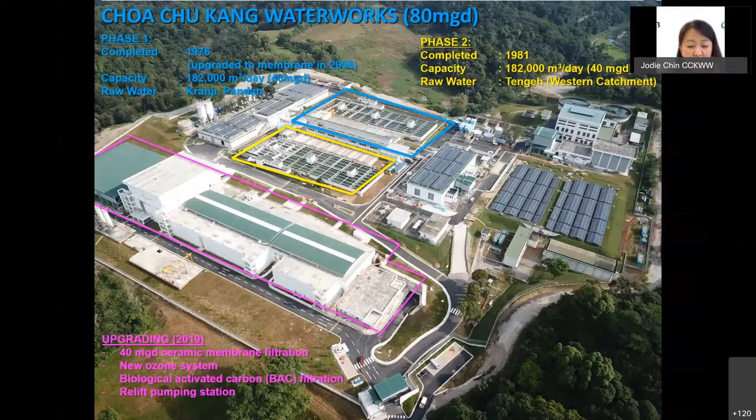We recently upgraded the plant in 2019, which is what I'm here to share with you today, with new ceramic membrane, ozonation system, as well as biological activated carbon, in short BAC. I'll run you through more on the processes in the next few slides.

Choa Chu Kang Waterworks is a bit unique compared to other waterworks. We take in our raw water from 3 different sources, which makes the operation more interesting and more challenging. We get our sources from Kranji, Pandan, and Tengeh reservoirs, so it's a mixture of them.

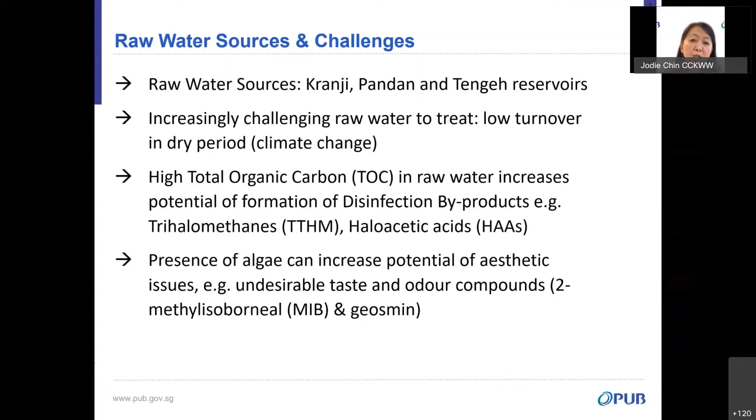As we go along, we have seen increasingly challenging raw water as Singapore urbanized at the backdrop of climate change - either very little rainfall or too much rainfall at one time, affecting our drainage system. Prolonged dry periods cause low turnover in the reservoirs, resulting in water quality changes. These 3 reservoirs generally have higher TOC, which increases the potential for formation of disinfection byproducts. Also, algae in the water can cause aesthetic issues such as MIB and geosmin. This is an issue because some customers are very sensitive and can pick up these taste and odor issues very quickly - not all of us will, but they will. With these challenges in mind, PUB has to continue our efforts to explore and deploy technology to ensure safe drinking water at affordable price to our customers.

Let me give you a quick run through of the overall processes. In phase 1, raw water from the reservoir goes through coagulation and sedimentation, where compounds such as NOM and DOC are removed. The settled water is then filtered through the membrane process in phase 1 and sand filter in phase 2.

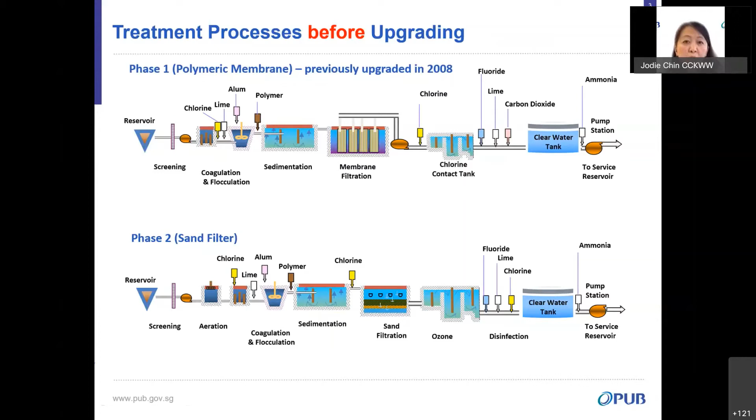Before going through the usual chlorine contact tank and ozonation respectively, the water then goes through the last stage of pH adjustment and fluoride dosage before being sent to the reservoir for distribution. So how do these processes change in 2019 when we had a major upgrade?

In 2019, the plant was once again upgraded, where ceramic membrane is introduced to phase 2 of the process. The sand filter was not taken out, but left as a provision. We added the ceramic membrane to the processes, and also combined phase 1 and 2 downstream processes, introducing ozonation, post-ozone reaction tank (PORT), and biological activated carbon (BAC) to our downstream processes, combining them towards 80 mgd.

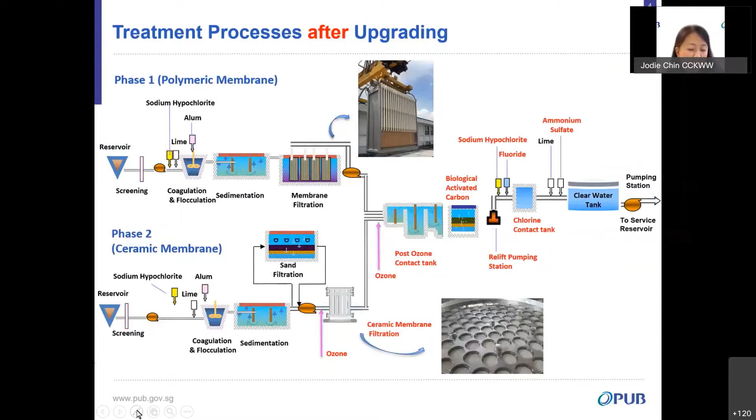This is a transition from our earlier stage of processes, from very conventional sand filter down to polymer membrane and then to ceramic membrane. This 40 mgd ceramic membrane currently housed in Choa Chu Kang Waterworks is the largest in the world. Here's a diagram showing our newly upgraded plant on the left, and the ceramic module with nominal pore size of about 0.1 micrometer on the right.

We have 12 such ceramic membrane modules, with 12 trains of 90 ceramic membrane modules housed in a single stainless steel vessel. Ceramic membranes have 4 times longer lifespan compared to polymer membrane, approximately 20 years versus polymer membrane's lifespan of about 5 years. Ceramic membrane is also able to withstand harsher chemicals by its own material.

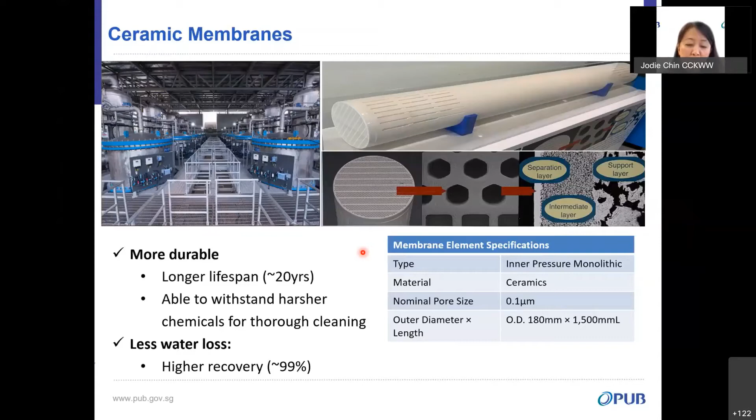Our system is a bit unique. This ceramic membrane system at Choa Chu Kang Waterworks is operated continuously with pre-ozonated feed water, meaning ozonation is ongoing on the surface of the membrane. The presence of ozone in the feed water ensures the membrane surface is cleansed continuously while filtration is ongoing, effectively reducing fouling. As a result, the ceramic membrane achieves high recoveries of more than 99% and high flux rates. So this is what we've seen so far in the ceramic membrane.

What about the ozone generator shelters we recently upgraded to? We had ozonation before, but now we've upgraded these ozone generators too, and they're much more efficient. We used to have 12 ozone generators to supply 80 mgd, but now it's replaced with only 3 new ones. Originally housed in a full ozone building in Choa Chu Kang Waterworks, now it's 3 small ozonators housed in a single room.

This is important to a utility like PUB because we are now in a land-scarce Singapore. Any land efficiency will help us in our design for new plants.

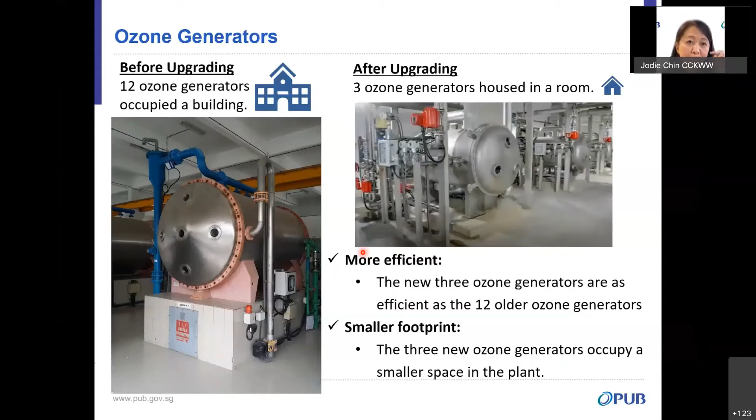What I shared with you just now was the ozone generator, which feeds into the PORT, the post-ozone reaction tank. Over at Choa Chu Kang Waterworks, we have 4 of such tanks, each with 6 cells, for the CT to be achieved. Here are pictures of the ozone generator and the PORT.

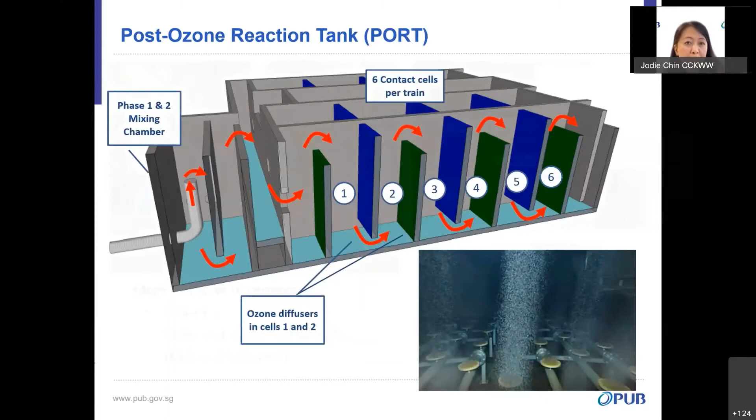While ozone disinfection is not new at Choa Chu Kang Waterworks, the use of BAC filtration there is a first in Singapore for drinking water treatment. Previously, CCK Waterworks used ozonation as a single-step process for disinfection, but it was unable to manage the high level of organics in the raw water. Subsequent downstream chlorination in post-treatment had to be delicately managed to avoid formation of disinfection byproducts, which was hard for our operators to manage. With the introduction of BAC filtration downstream of ozonation, dissolved organics are removed from the treated water, creating a biologically stable water and eliminating the risk of disinfection byproduct formation.

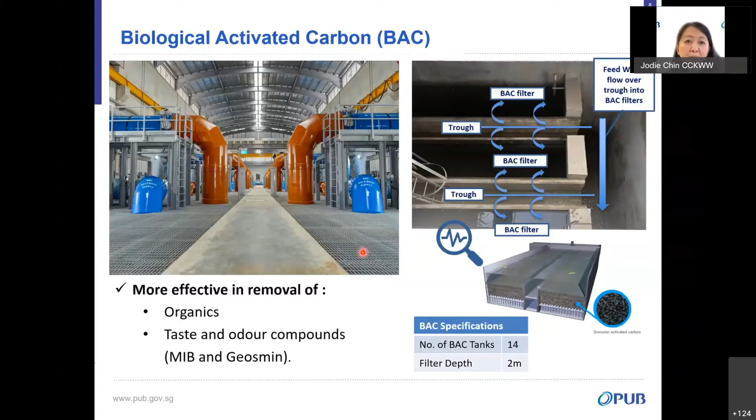The BAC is also effective in the removal of taste and odor compounds, such as geosmin and MIB, which I mentioned in the first slides on the challenges. Next slide.

This slide will share more on the overall benefits - what we actually observed after operating the plant for a year plus. As we shared earlier, due to the presence of ozonation on the surface of the ceramic membrane, which is something unique, we are able to achieve higher recovery.

This not only helps reduce water losses, which in turn reduces cost in handling the waste generated from these membranes, but also helps reduce pumping costs for raw water since we need less raw water for production. With the upgraded processes, we're able to handle more confidently poorer raw water, such as that from Tengeh Reservoir, where DOC is high.

When we were running both trains of ceramic membrane and polymer membrane together, we can see that with worse quality raw water, the ceramic membrane has a lower tendency to foul, likely because the surface is always cleansed, so fouling may not build up as fast as what we observe in polymer membrane.

Also, with the overall longer lifespan of 15 to 20 years, which I mentioned in earlier slides - why is that important to us and how does it help? We'll also be able to save on the downtime needed for membrane replacement every 5 years.

If you think about it, CCK Waterworks needs to meet certain load dispatch every day. So if we are down for membrane replacement, it means we are compromised on our full capacity. Singapore's water demand will not decrease just because CCK Waterworks needs downtime to replace this membrane. So we will always need the next drop of water, be it from another waterworks or from desalinated water - and if it's desalinated water, as we all know, it is more expensive. So by reducing the downtime for membrane replacement, it helps us as a utility manage our capacity requirement.

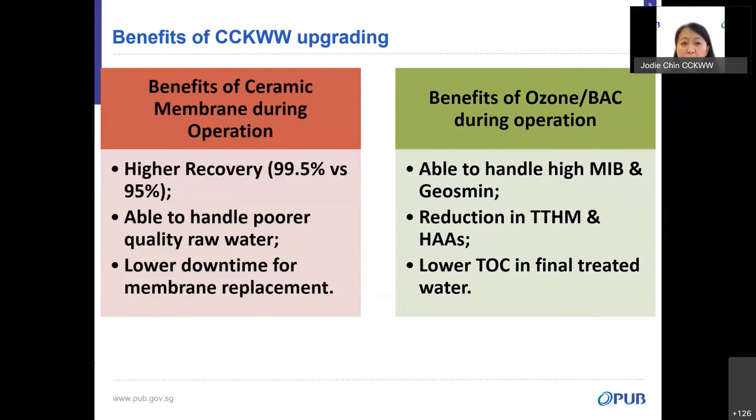So, next slide. I'll go into a summary of what I have here. Before I show you a video - unfortunately due to COVID, I'm not able to show you guys around the plant for a visit, so I've replaced it with a video I'll play later. Some of you might have seen this video before during the opening of the plant last year, but bear with me as I show this to the rest of the members so they can see the real pictures and videos of the plant itself.

With the upgraded processes, CCK is able to sustainably produce good quality water at full capacity despite fluctuations in raw water quality. This further boosts Singapore's water resilience, especially with potential climate change impacts on our reservoir quality. This project has also demonstrated PUB's relentless efforts in addressing our challenges through R&D and deployment of technology to fulfill our mandate of ensuring a clean, safe, and sustainable supply of drinking water for Singapore.

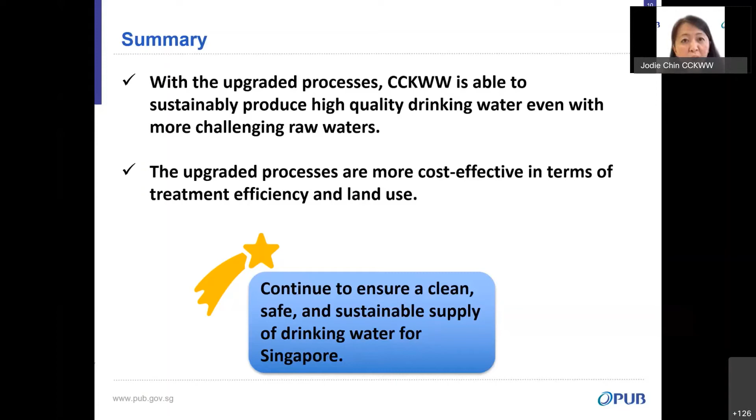So yeah, Vivian, will you be able to help me play the video for the people here?

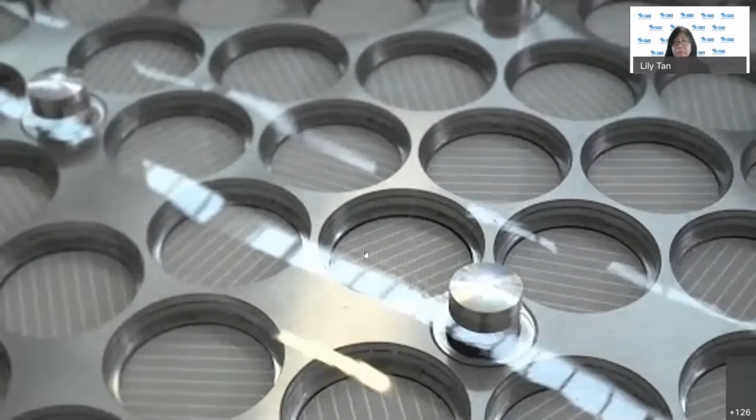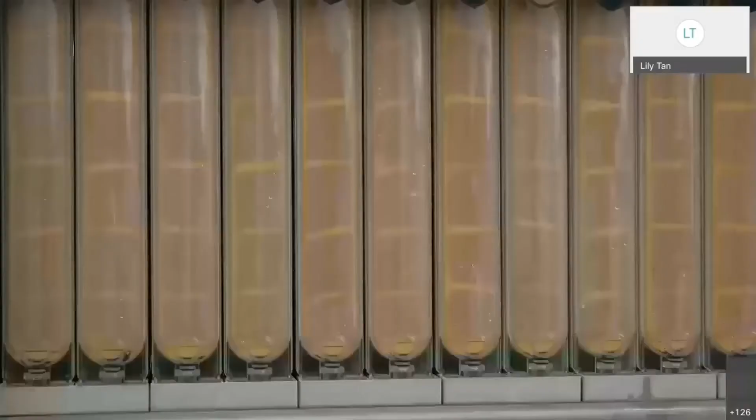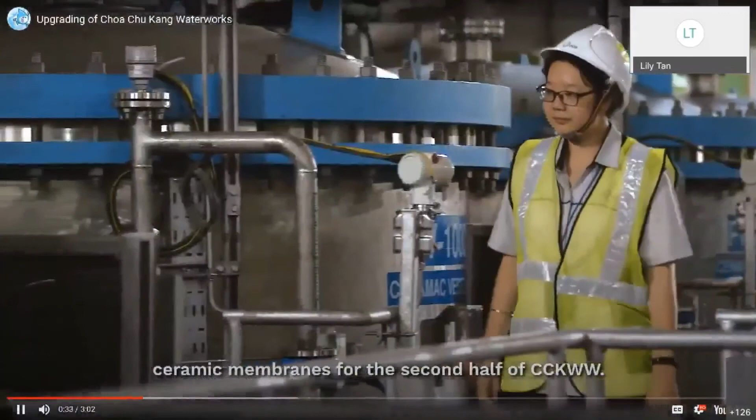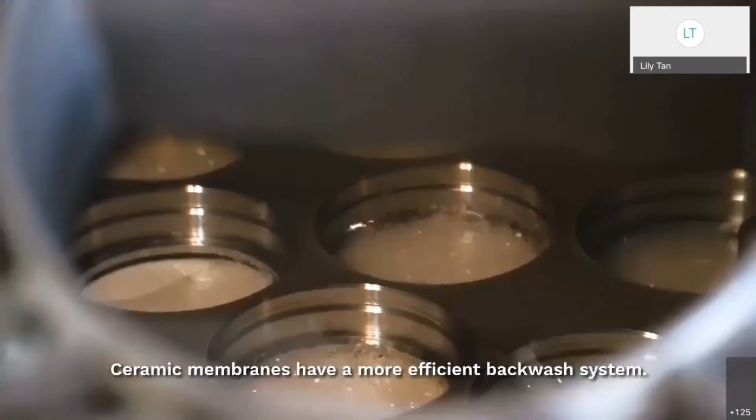Choa Chu Kang Waterworks has come a pretty long way. When it was first built, sand filters were the norm and the technology to use, and we used that for more than 30 years. Then in 2008, we decided to start looking at new technologies in the market and upgraded half the plant to polymeric membranes. More advancements in technology have come along, and new materials in membranes were developed. I'm very happy to say we have now commissioned the ceramic membranes for the second half of Choa Chu Kang Waterworks. At 40 million gallons per day, our ceramic membrane plant is actually the largest in the world. Ceramic membranes have a longer lifespan - they can last 20 years. In comparison, polymer membranes only last about 5 years. We push water molecules through a barrier which has tiny pores - in ceramic membrane, we have 0.1 micron pore size. If you stack 500 membrane pores together, it looks like a strand of human hair. Ceramic membrane has a more efficient backwash system, which means you can clean the membrane better compared to polymer membrane.

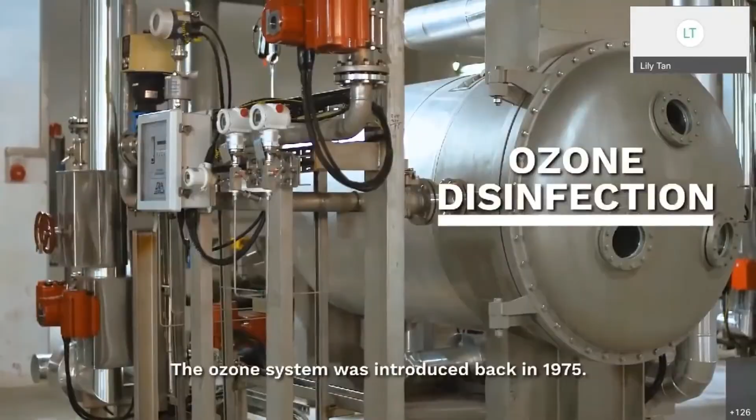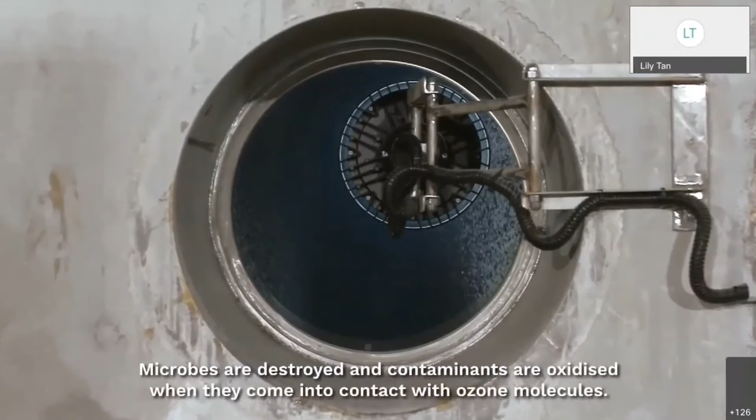Ozone system was introduced back in 1975. We used to have 12 ozonizers. Now we only have 3 ozonizers to produce 80 mgd of water. The system now is much more efficient. Microbes are destroyed and contaminants are oxidized when they come into contact with ozone molecules. It can break down organic matter into smaller molecules.

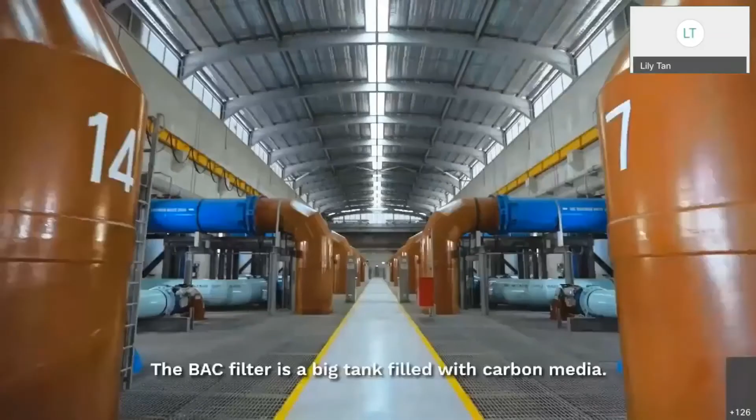After ozone, water will flow through the BAC filters. BAC process is introduced to increase the robustness of the water treatment. The BAC filter is like a big tank filled with carbon media. BAC is able to absorb small organic matter and dissolved organic matter. It's also an additional barrier against impurities.

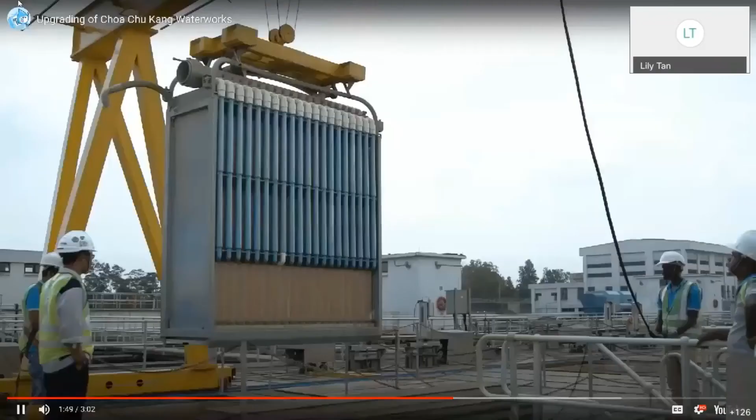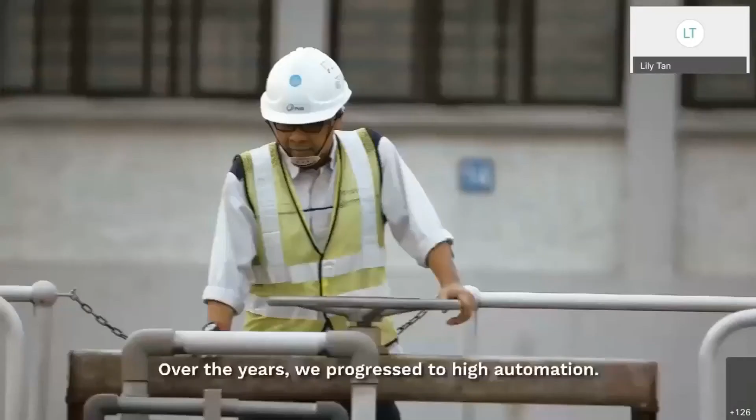I've been working with PUB for almost 35 years. Back then, process-wise, we were running on manual mode. We had to go down to site to start and stop the pump, open and close the valve. Over the years, we progressed to high automation. We can monitor the system via our control room. One thing that does not change is PUB's commitment to water quality. We are always improving to ensure that the water quality is good and within WHO guidelines.

I'm really proud and honored to be part of the team all these years. This project took 3-4 years and many people were involved. All of them put in a lot of hard work to make this happen, so I'm really proud of them.

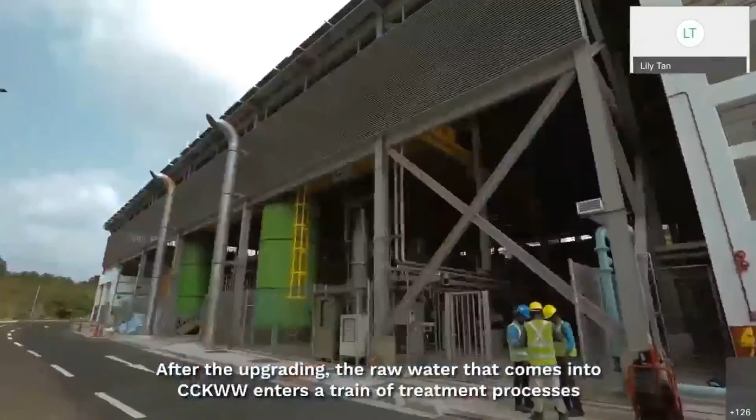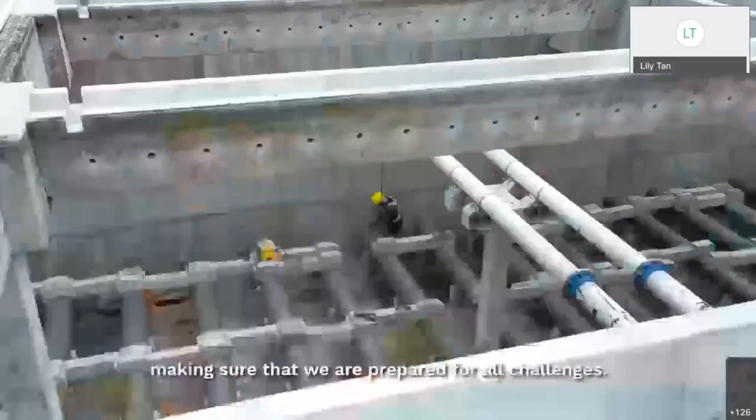After the upgrading, the raw water that comes into Choa Chu Kang Waterworks enters a train of treatment processes that is more advanced than ever before. PUB is always anticipating future needs. Our upgrading projects all take into account what could happen in the future and make sure that we are prepared for all these challenges. We need to adapt, innovate and grow in order to secure our water future.

Okay, the first question is, what are the challenges in terms of technology for BAC, like reaction time, efficiency, regeneration, etc.? From Kiran.

Dr. Chin, please. Oh, yes. Hi. Okay, give me a moment. I got some echo here. Yeah.

Okay. So did I hear correctly that the question is about BAC challenges? Since we first started BAC, the BAC comes with its own design of residence time and everything. Not quite sure what the question is about with challenges, but so far the BAC has worked well for us. Will I be able to get Ying-Jie to share on any challenges that we've seen so far? Okay.

Morning everyone. I'm Ying-Jie from Choa Chu Kang Waterworks. I think in terms of BAC, it's quite new for the region. Most of the BAC we see are operated in Europe or North America, which have a very cold climate. So the microbes grow differently here. It's much faster here. So we have to operate BAC with more frequent backwashes compared to our European and North American counterparts. So this is one of the challenges.